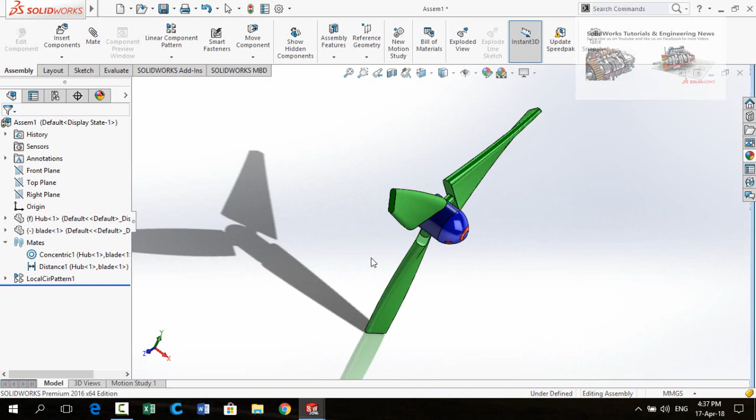Bismillahirrahmanirrahim. Assalamu alaikum friends. In this video I am going to design this type of propeller in SolidWorks, in which I will tell you how to project a spiral sketch on this type of face, and also how to use the flex command to tilt the blades like this. So keep watching this video till the end.

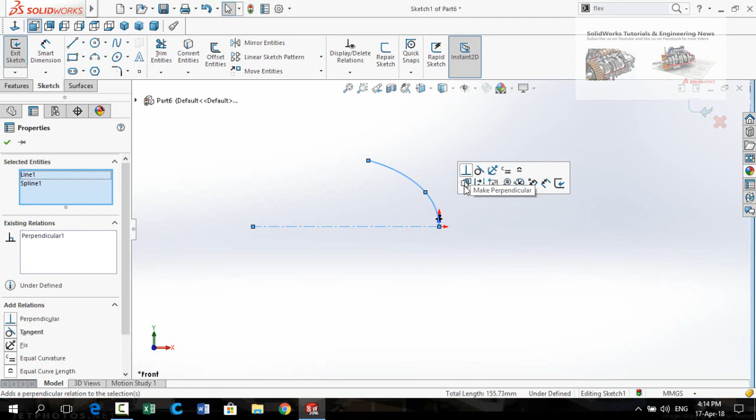Now from here select line and draw it from here. Press escape, then select this line and the spline, and make their relation perpendicular.

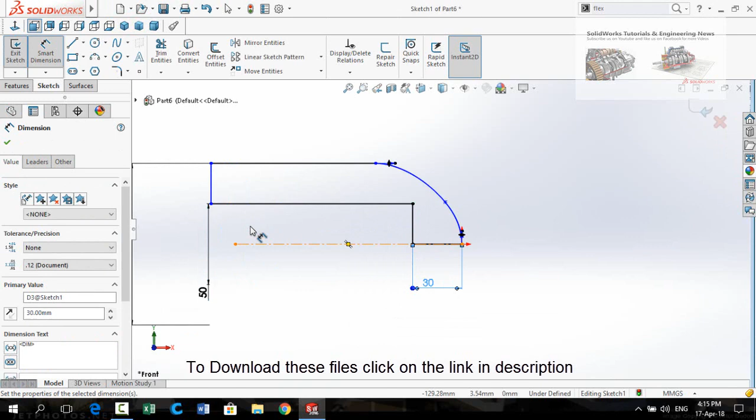Now define the diameter as 100 millimeter, and this diameter for the bore is 50 millimeter. This distance is 30 millimeter and this distance is 100 millimeter.

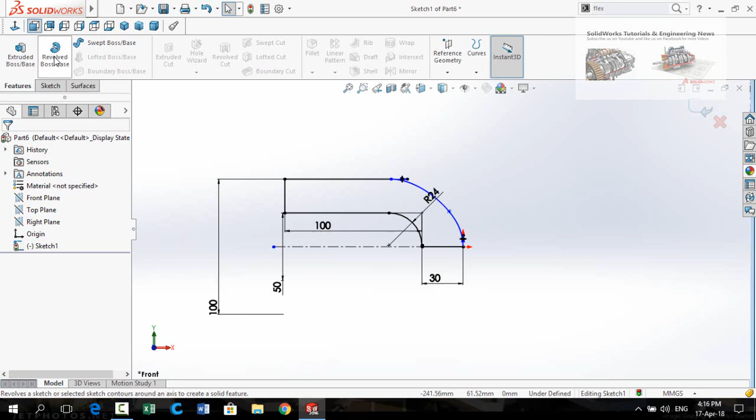Press escape and then select the sketch fillet command from here and select this corner. Fillet radius is 24 millimeter, press OK, and press OK again. Now go to the Features tab and select Revolve Boss Base command, then press OK to apply.

The next step is creating a sketch or spiral sketch on this face. For that, click on right plane and select sketch. Make it normal to, draw a circle on the origin, and define the diameter as 10 millimeter. Press OK.

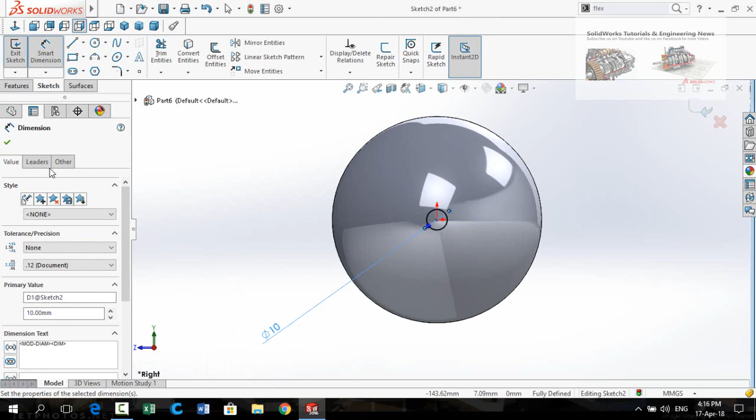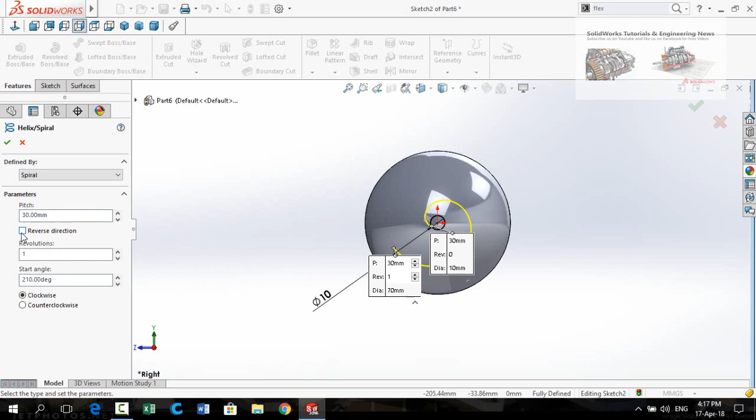Now in the Features tab, click on the curves button, then select helix, click on the box defined by, and select spiral. Select pitch 30 millimeter, and the revolutions are 1. Start angle is 210 degrees. Press OK.

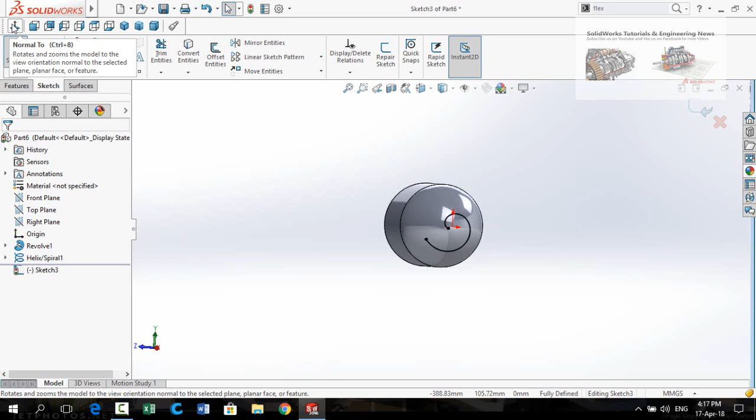Once again click on right plane and sketch on it. Select this spiral and press convert entities. Make it normal to. Now select offset entities command and select this spiral. Offset distance is 10 millimeter, then check the box reverse direction. Make sure cap ends is checked, and in cap ends this option is marked lines. Press OK.

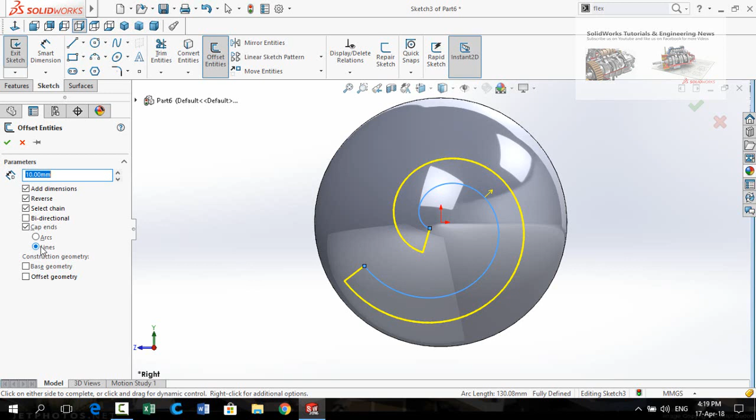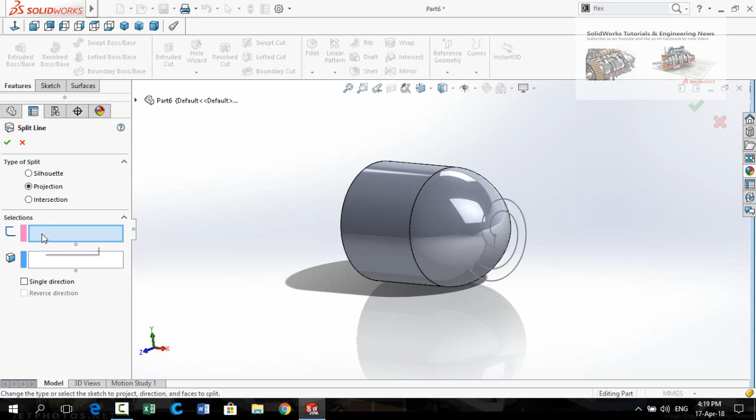Press this button to save and exit from sketch. Again go to Features tab and click on the curves button, then select split lines. Type of split is projection, and the sketch is this offset entities sketch, and the face is this face. Now simply press OK.

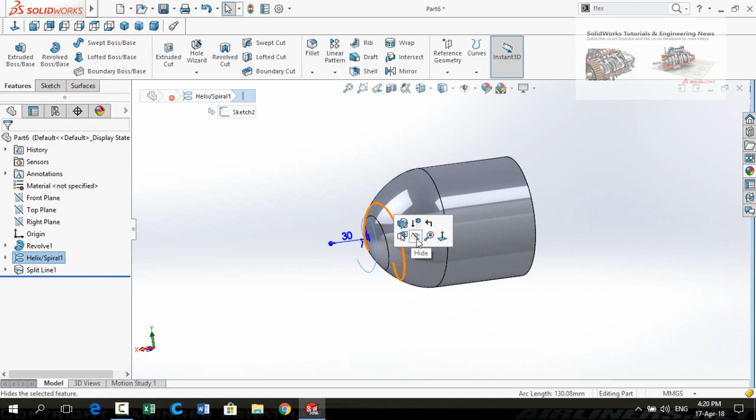Hide this spiral. Select this face to change its color. Now select this face.

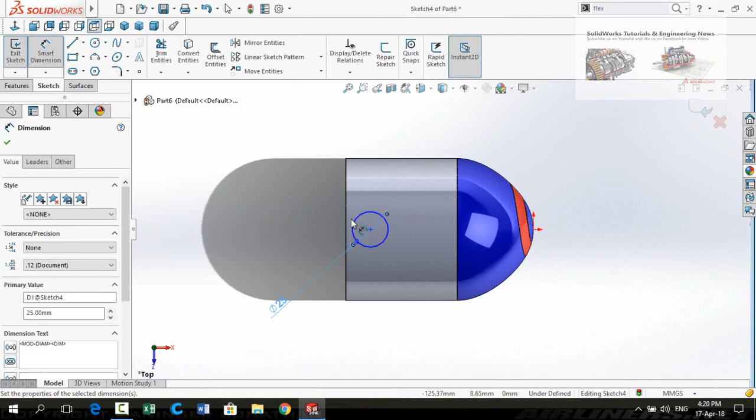Now click on top plane and select sketch. Make it normal to and draw a circle. Define it to 25 mm, and the distance from this line to the center of the circle is also 5 mm. Press OK and then escape. Now select the center of the circle and the origin, and make their relation horizontal. So our sketch is now fully defined.

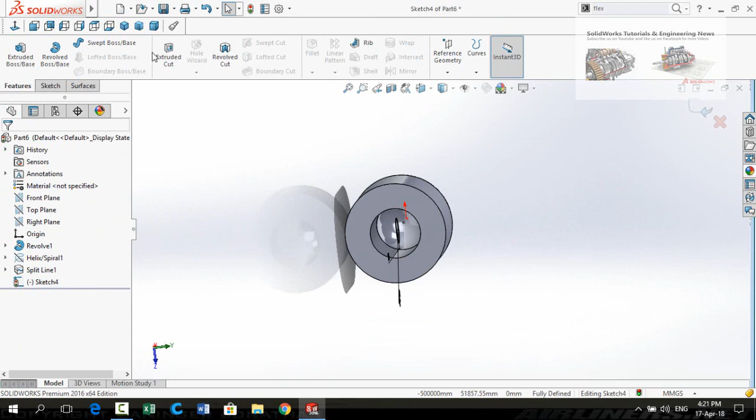Go to Features tab and apply Extruded Cut command. Press OK.

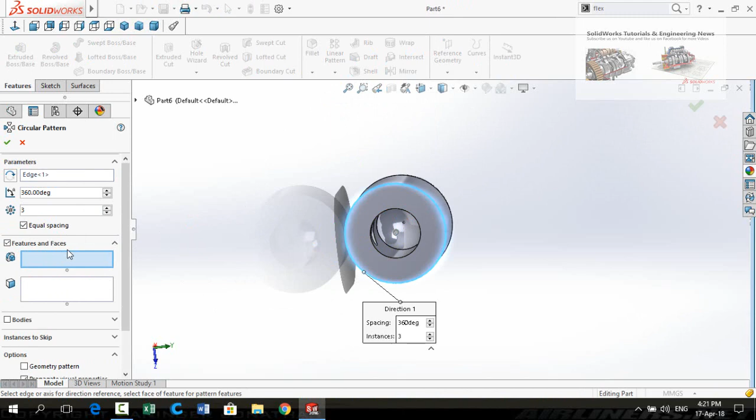Now click on the arrow below linear pattern and select circular pattern. Select the pattern axis box and select this circular edge. Now click on the box for features or faces, and select this circle. Quantity is 3. Press OK.

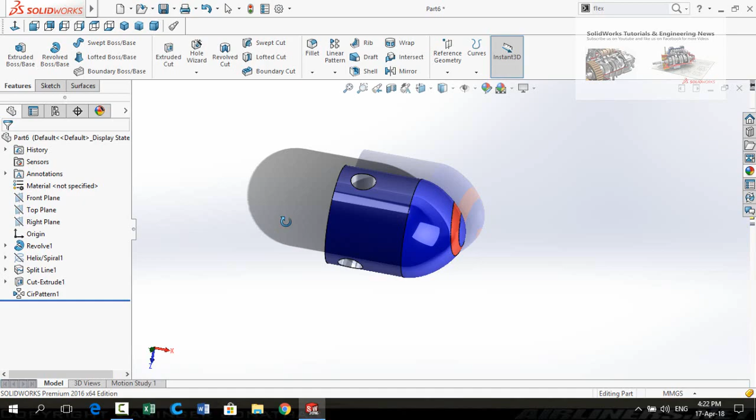Select this face and change its color. Press OK. Now save this part.

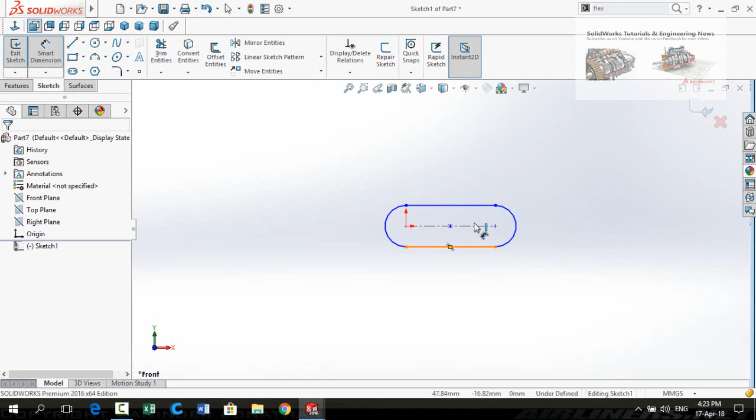Start from a new part again. Click on front plane and select sketch. Now select straight slot and start it from origin. Define this width 30 mm and this length 100 mm. Press OK and then save and exit from sketch.

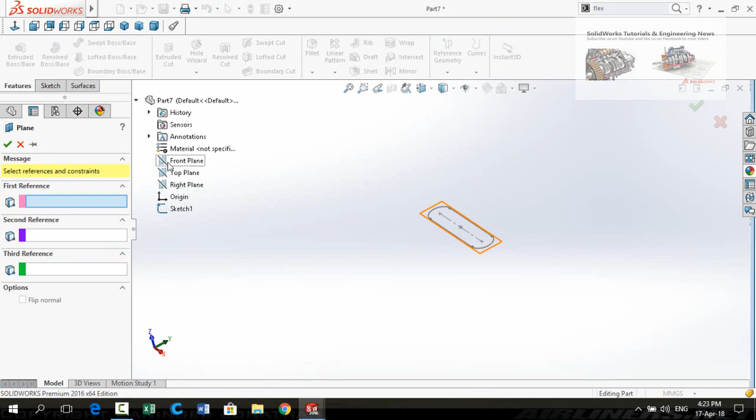Now click on reference geometry and select plane. Drop down these options and select front plane as the first reference. Type here the distance 350 mm. Press OK.

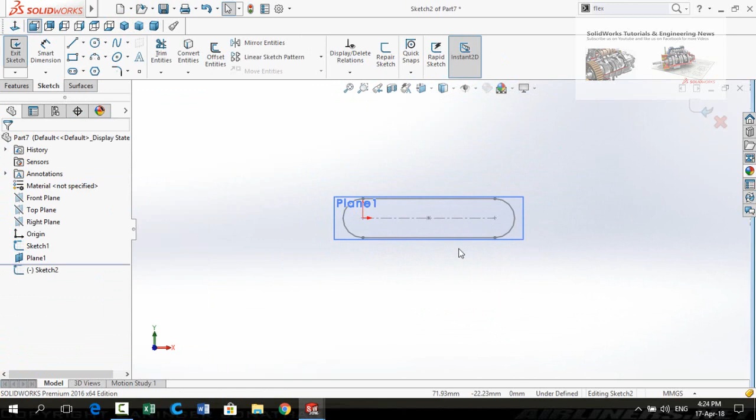Now click on this new plane 1 and sketch on it. After that I will apply the lofted boss base command. Again draw a straight slot. Press escape, then define it using smart dimensions.

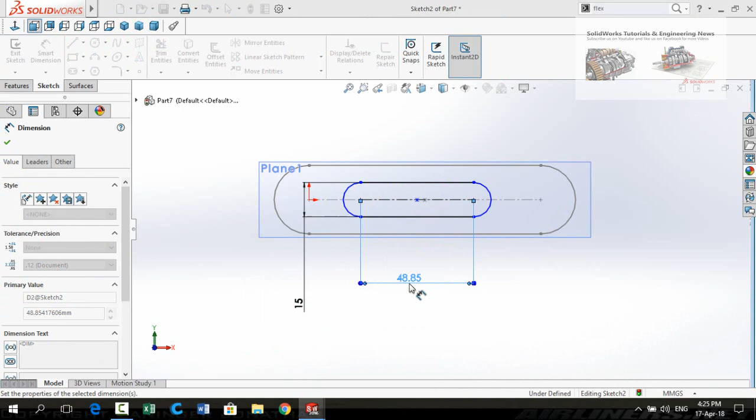This width is 15 mm and this length is 50 mm. Press escape, then select this point and this point, and make their relation coincident. Press this button to save and exit from sketch.

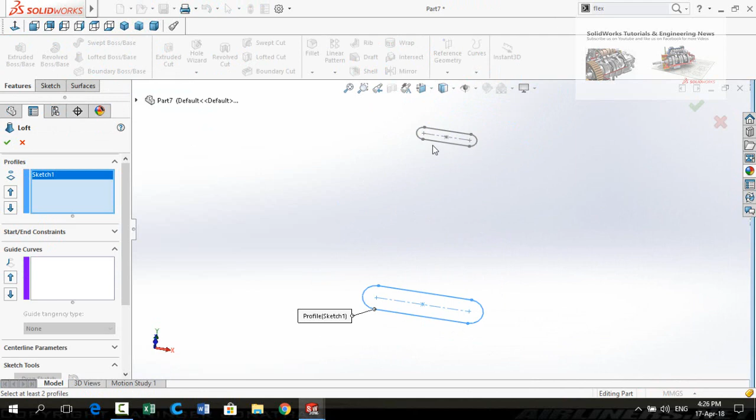Hide this plane 1. Go to Features tab and select Lofted Boss Base command. Select this sketch and this sketch. Press OK to apply.

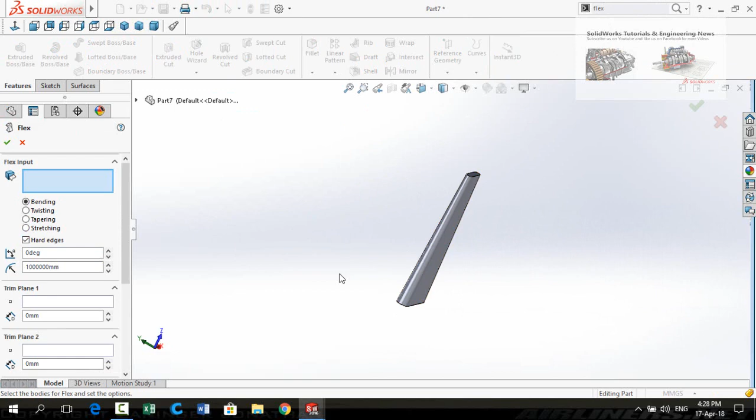So now we have to tilt or twist this blade. For that, go to the search bar and type flex. Select the flex command, select this blade, and check the option twist. Drag this point downward and from here select the degree 50. Press OK.

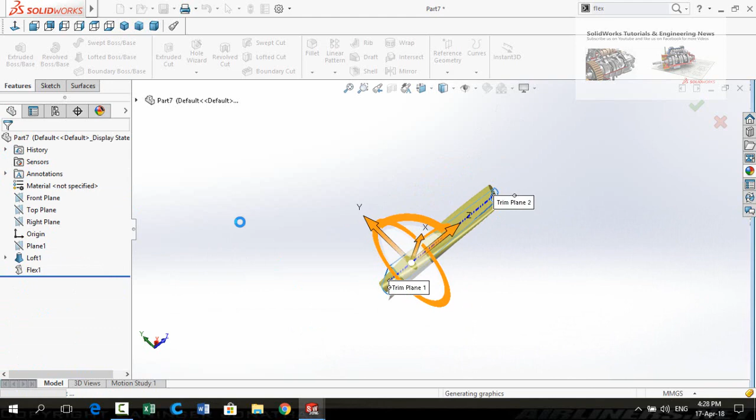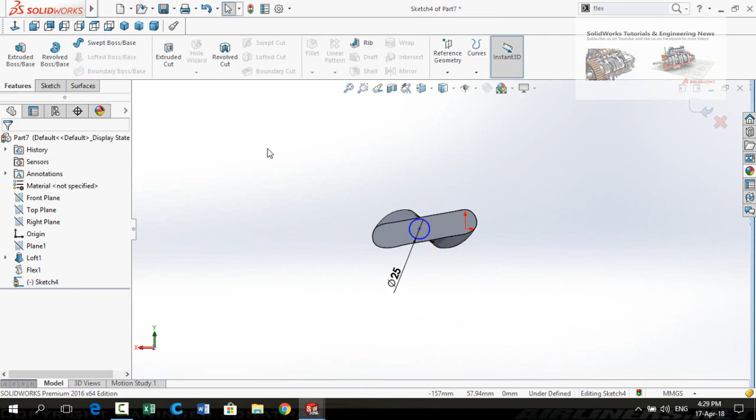Now click on this face and sketch on it. Make it normal to and draw a circle, define it to 25 mm. Press OK, then go to Features tab and apply Extruded Boss Base command. Extrusion thickness is 50 mm. Press OK.

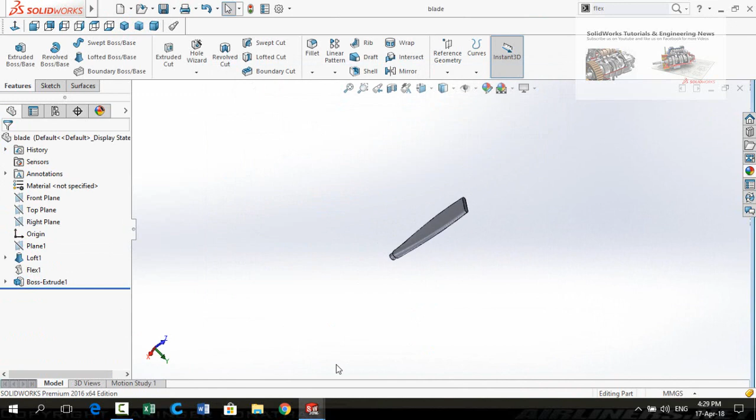Now save this part as blade. Press Ctrl plus N from your keyboard and start a new assembly. Import both of these parts, hub and blade.

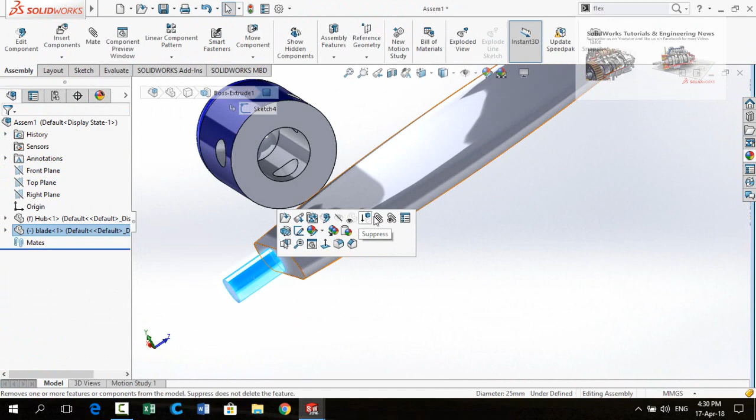Select this cylindrical face of the blade and select mate. Now select this cylindrical face of the hub. Press OK and make sure that you did not lock the rotation. Press OK again.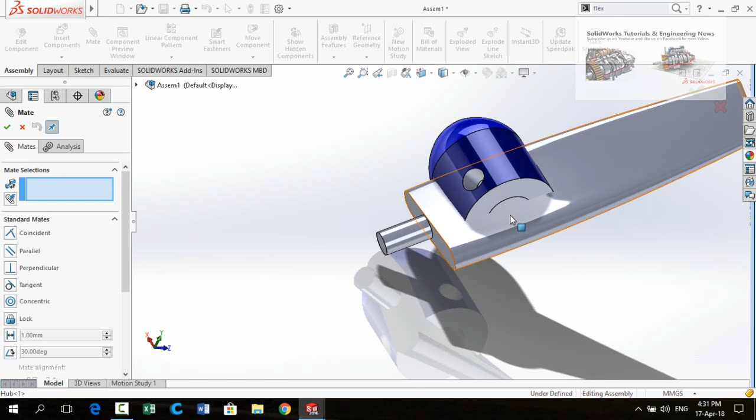Now select this face and then this face. Select distance mate and type here the dimension 30 millimeter. Press OK. Again press OK.

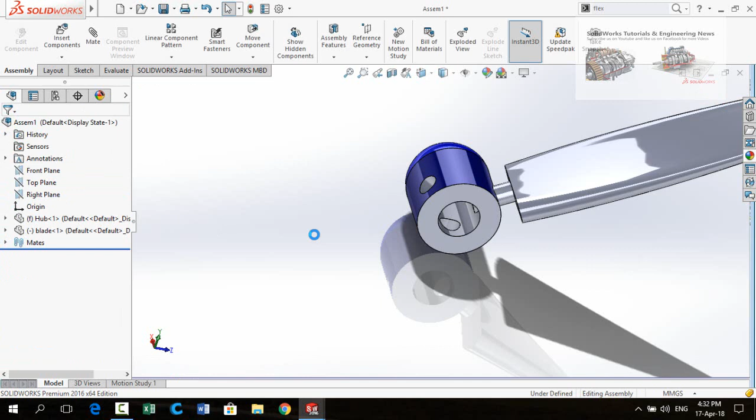Now you can manually adjust the degree of the blade. Now we have to lock the rotation.

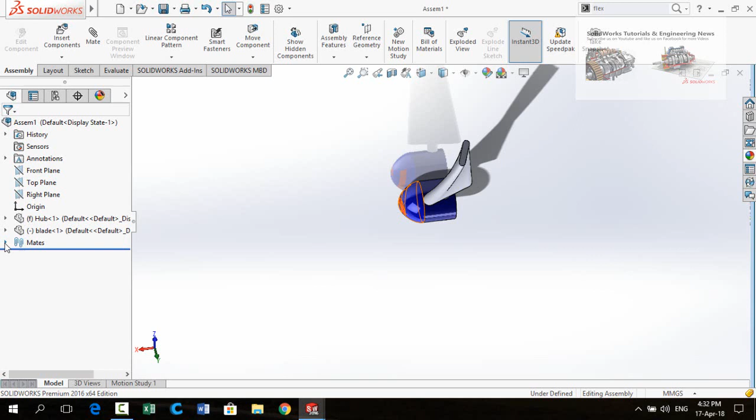So for that, drop down the mates tree, click on concentric mate, and then edit feature. From here lock the rotation. Press OK. Again press OK.

Now change the color of the blade. Press OK.

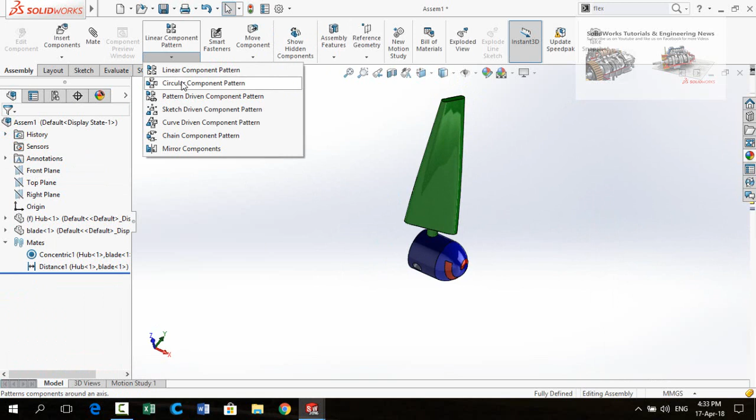Now click on the arrow below linear component pattern and select circular component pattern. Select this component and click on the pattern axis box. Now select this circular edge. Quantity is 3. Make sure equal spacing is checked.

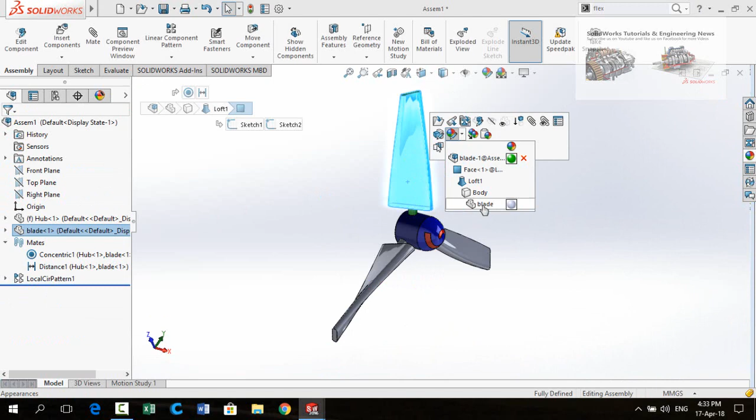Press OK. Again click on this blade and then click on this arrow, select the option blade. Now select the color for all.